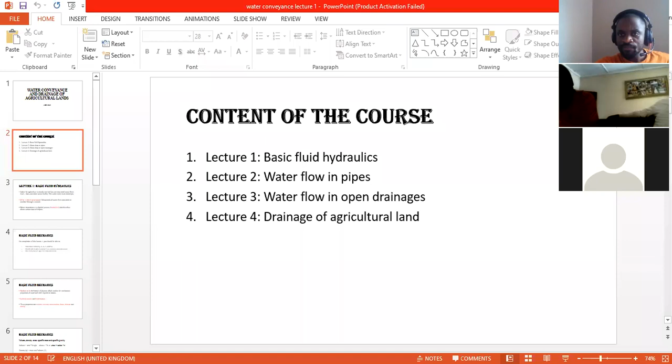Okay, are we able to see the screen? Are we able to see the PowerPoint presentation? No, we are not. Okay, what's on the screen? There's nothing. Are we able to see it now? Okay, we can now see the screen. The host is around. Maybe there is something he's doing. Your mic is off, sir. Your mic is off. Yeah, sorry. I keep having problems because it keeps on reconnecting me, like the internet, so it's disturbing the flow of the session. Okay, are we able to see the screen?

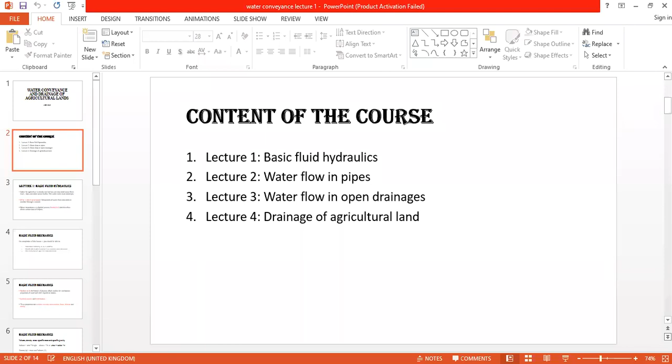Okay, so as I was saying, we're going to have 4 lectures. The first one has to do with basic fluid hydraulics. Then the next one will be about water flow in pipes. The third will be water flow in open drainages. And the last one will talk about the drainage of agricultural lands. So we go into the first one, which is going to concentrate on basic fluid hydraulics.

So like I said, this course has to do with water movement. So in dealing with water movement, we'll look at a lot of physical properties of movement of water. We know that for water to move from one point to another, it is governed by several water physical properties. If you have any question, you can just interrupt me and ask a question as I deliver.

Okay. So we have seen that in most cases, for example here in Zambia, most of the water that we use for agricultural purposes is from the rains. But there are certain circumstances where you would want to use water from rivers or from other reservoirs. So for you to use that water, you need to move it from the reservoir to your farmland to use for irrigation and other purposes that you might want on the farm.

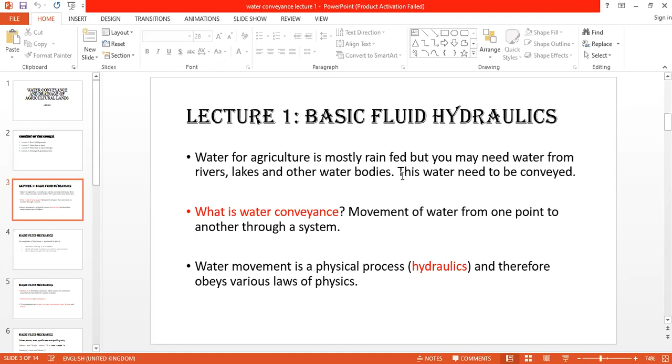Which brings us to the core of this course, which is the conveyance of water, basically the movement of water from where it is to the point where it is being needed. And like I said, all this is governed by the physics of the water. For it to move from one place to another, it obeys the laws of physics. So for us to fully appreciate this course, we have to go back a little bit and dwell on some principles of physics, which will help us fully understand what we are talking about in this course.

So on completion of this lecture, which is basically chapter 1 in your module, you should be able to understand the different principles of physics which govern water flow, and identify which of these principles affect water movement. And in the end, you have to relate how that physical property will affect the design of a conveyance system that you'd want to put up on your farm or on your small holding. So basically, if you're able to do these 3 things, then I'll be happy with that.

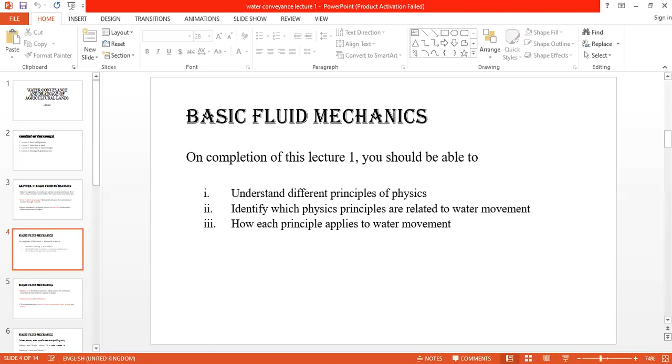Okay. Unless there are questions before we start looking at these properties. Okay.

Okay. So basically, this branch of science where we are looking at the flow of water, the conveyance of water, is what is known as hydraulics. It's a branch of physics which studies the mechanical properties of water and other liquids which are in motion. When you go into literature, it will be divided into two: hydrodynamics and hydrostatics.

When we're dealing with hydrodynamics, we are looking at the properties or characteristics of water which is in motion. So we look at the speed of water, how the energy is changing and things like that. Hydrostatics is where you have water which is not moving, it's just static. For example, water in reservoirs, ponds, tanks. So you look at the properties of water that is standing and not in movement.

Some of these properties that we'll look at include the volume. We are looking at volume because at some point you would have to know how much water you want to deliver to your farm, how much water is required to be used at a particular time. So the concept of volume becomes very important.

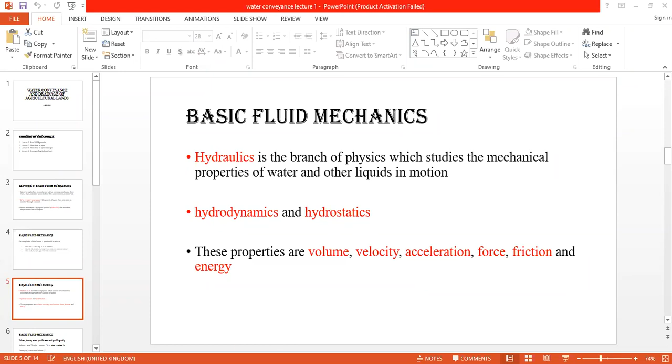Okay, so we can look at these properties one by one. I'm sure some of them you know already and you've used them in various aspects. Those who are dealing with water and other areas, I'm sure you've seen some of these parameters. So the first one that we'll look at is the volume. The volume, like I said, will determine how much water you need. So it's important you know what volume is and how it can be calculated.

From our basic physics, we know that the volume will be equal to the area of where your water is, be it a pipe, be it a tank, multiplied by the height. That gives you the entire space the water occupies. So area times height will give you the volume of a vessel. But not all vessels are of the same shape. If it's rectangular, the area will just be the length multiplied by the width of that container or tank.

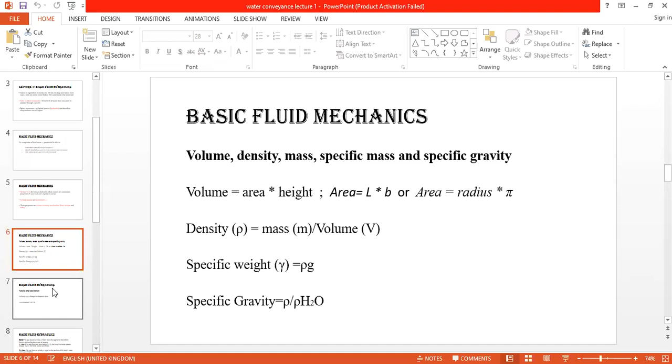Then we can also look at the velocity and acceleration. So when we're talking of velocity, it's just basically the rate, the change of distance with time. So how fast is the water moving in your pipe or in your drainage or in your open channel? How fast is it moving? So this will determine how much time we are going to let your water flow, either in the pipe or in the open drainage. So if you know that, okay, I'm supposed to supply this amount of water, 10 cubic meters of water, you need to know in how much time am I going to deliver this water? So that's why the concept of velocity comes in very handy.

It's similar to acceleration. They are interrelated because acceleration is the rate of change of velocity with time. So as the velocity is changing, if it's increasing, it means that you will need less time to deliver your water because it's coming into your field very fast.

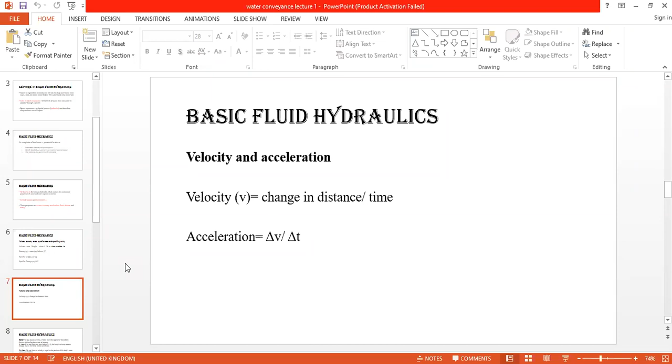Then now, because we say that for water to move in a pipe or in an open drainage, you would need to apply a force to it. In short, you need to push it. So we need to understand what force is and how it is related to the water movement. How much force do I need to apply to move water from point A to point B?

And force, if we are looking at force, we can look at it with three laws. I'm sure you've seen these three laws. Those who have done physics, I'm sure most of you have done physics either in your secondary school or at tertiary level. So if we talk of force, we can define it or relate it using three laws of physics.

So the first law will state that if a body is seated, for example, on a table, and if no force is applied to it, if you don't push it, then that body will remain as it is. If there's nothing pushing it, it will remain as it is. So, for example, if you take your phone and put it on your table, it will remain there until you start to apply a force to it, until you start to push it. So that's what the first law of force says.

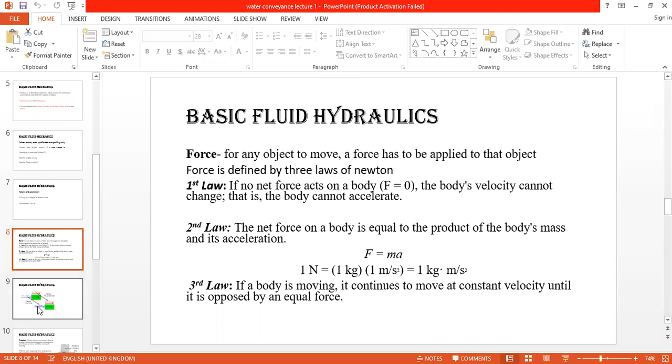So if you want to know how much force is required to move that object, you need to multiply the mass, which is 5 kgs, by the acceleration, that is the speed at which you want it to move. So in this case, if we multiply 3 by 5, it will give us 15.

But if I want to move this object at a higher speed, then I would need to increase the acceleration of this object. So in that case, I will need to apply a much higher force. So if I want to move it at a higher speed, I apply a force of 30 newtons, which is basically the product of the mass multiplied by the acceleration. So that's just basic physics.

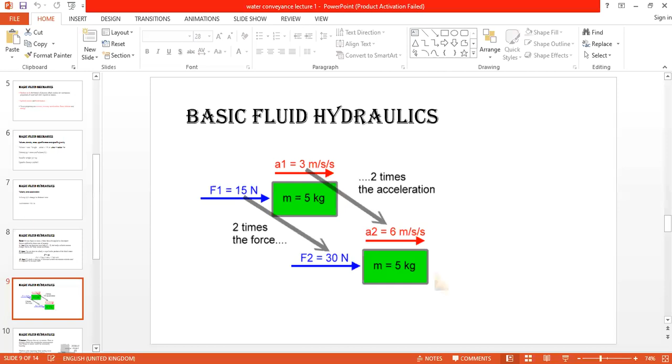So we can move on to another concept. We mentioned it in the third of Newton's laws, which says that something which is in motion will continue to move until a force that is opposite to it has become equal to it, so that object now will stop. So every object that is moving in nature always has an opposing force. Otherwise, everything in nature would have been constantly moving.

So the force that opposes movement of an object is what we call friction. So friction is a force that opposes the movement of an object. For every moving object, there's always a force that is opposing it. And this friction we can divide into two components: the static and the kinetic friction. So for static friction, I'll use the example of the phone. If I put a phone on a table, it's not moving because already there's what we call static friction, which is opposing its movement.

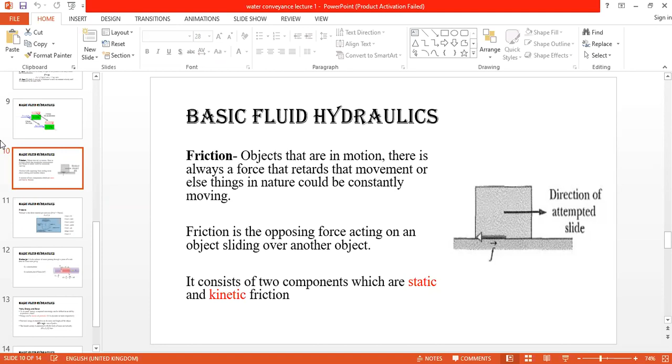Okay, then the other parameter that we can look at is pressure. We know that when we open our taps at home or any other place, we usually say there's low pressure, there's high pressure, and things like that. So what we mean basically there, we're just talking about the force, how forceful the water is coming out.

So we need to know that concept of force for us to relate it to the movement, the delivery of water to our fields, because obviously we would need water to be flowing at a higher pressure to our field for us to complete our tasks in a shorter period of time. If we have lower pressure, it means that the water reaching our farm or our reservoirs would take a lot of time to fill in our reservoirs or irrigate.

So basically, pressure by definition is the force that is exerted per unit area of a container or whatever vessel the water is being kept in. When we talk of water pressure, it has a different approach than when we're talking about any other object in terms of pressure, because when we're talking of water, there's what we call the pressure head. The pressure head is basically just the height of water above a certain surface.

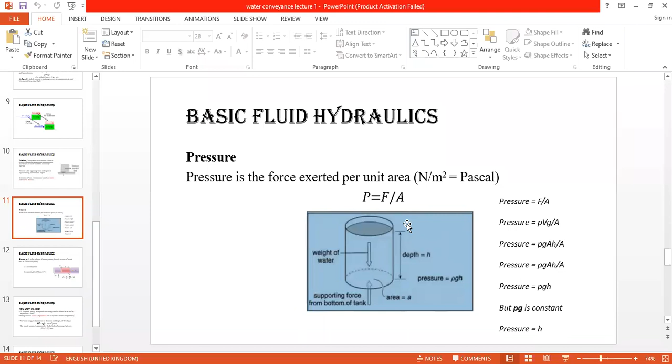Okay, so I'll move to the next concept, which is discharge. So like I've always been saying, in reality, what we want is to know the volume of water. How much water am I going to deliver to my field? Or how much water am I going to deliver to my reservoir or anything on the farm? So basically, when we're talking of the rate at which you're delivering water to your farm, we are basically talking of the discharge. So if I say, what is the discharge of your system? You're going to give me a unit to say, okay, I'm able to deliver 1,000 or 1,000,000 cubic meters of water in an hour to my farm.

So when you know that, okay, I want to irrigate with a certain amount of water. So for example, I don't know if it's next semester or next academic year, there will be a course on irrigation. So when you're dealing with irrigation, you want to know how much water you want to supply to your farm, how much water is required for you to irrigate the whole area. So if you know the discharge of your system, I'm able to deliver this amount of water to my farm, then you can calculate how much time you need to irrigate. So the concept of discharge comes in handy, as it is the volume of water being delivered or passing through a certain point in a unit time, be it in seconds, be it in hours, or any other unit that you would want to use. So discharge is basically the volume per unit time.

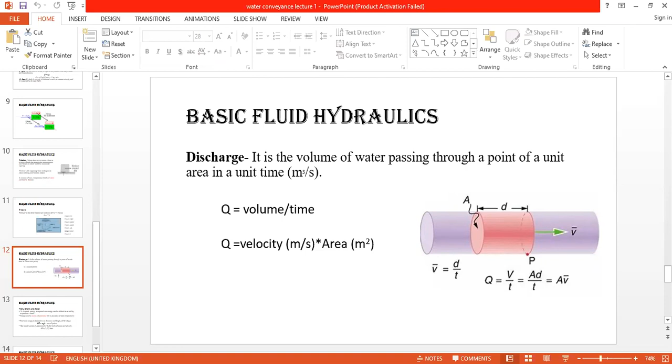So basically, when we talk of discharge, we can calculate it as area multiplied by the velocity. Then you get your discharge, which is the volume of water being delivered to your farm or wherever.

Then remember, we said that for water to move, it needs to be pushed. Like the example given for the phone, there's need for some energy to be applied to it. So for every water movement, there's always energy that is applied to it for it to move. So that energy will produce a force, and that force would drive the water. So there are two things: what we call potential energy and kinetic energy.

So the potential energy is just the energy that is possessed by an object due to its height. For example, if you put any object on the floor, it will remain on the floor because it doesn't have any energy to move. But if I lift it up and then let go of it, it will move because now it has gained some energy because of me lifting it up. It needs to come back because it's being pulled by the force of gravity. That ability to come down from the height where you have put it is what we call the potential energy.

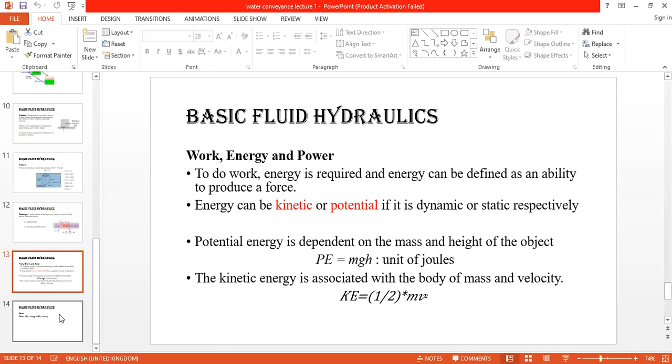If you take the energy and then divide it by the time, you get your power, your unit of power. So when you get that unit of power, you know that, okay, I need this amount of units. For example, if you get Zesco units or electricity units, you know that I need this amount of units for me to irrigate my farm.

So the concept of power now comes in handy as well if you want to know how much money you're going to spend on your irrigation, because you know how many kilowatts of power you use to irrigate your farm, or to move your water from the river to your reservoir. So these are the basic concepts that I wanted us to go through before we go into the actual flow of water in pipes and in open drains.